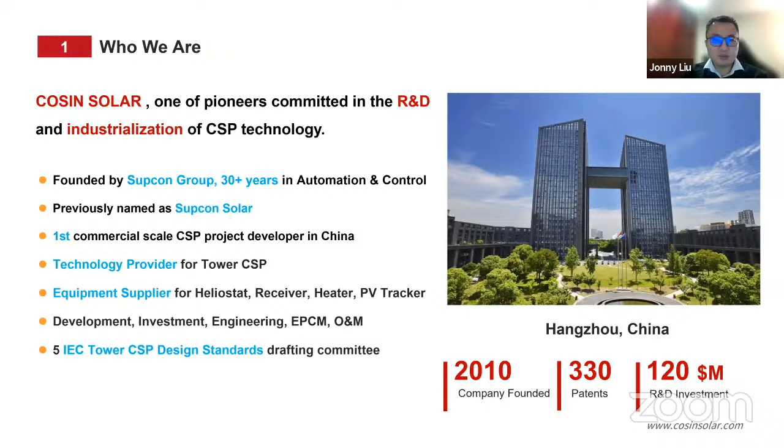I'm Jonny Liu, the Director of Global Business Development of Cosin Solar. So first of all, let me use several minutes to introduce Cosin Solar and our business. Cosin Solar was founded in 2010. We are a technology provider and also equipment supplier for the tower CSP industry. We have mainly 3 business areas. The first one is the CSP power business. It could be a single CSP project or a hybrid project, CSP plus PV plus wind. This is the main business.

And then we also have a molten salt storage business. For this part, we can use the molten salt electric heater to heat the molten salt, not relying on the solar resource, not using the solar field. So it can be more flexible and deployed in more areas. And the third business is we can also provide the PV tracker. This is a new business from Cosin Solar. Desalination is not our main business, but we do have some projects combining CSP, molten salt storage, and desalination, which I will introduce in the last slide.

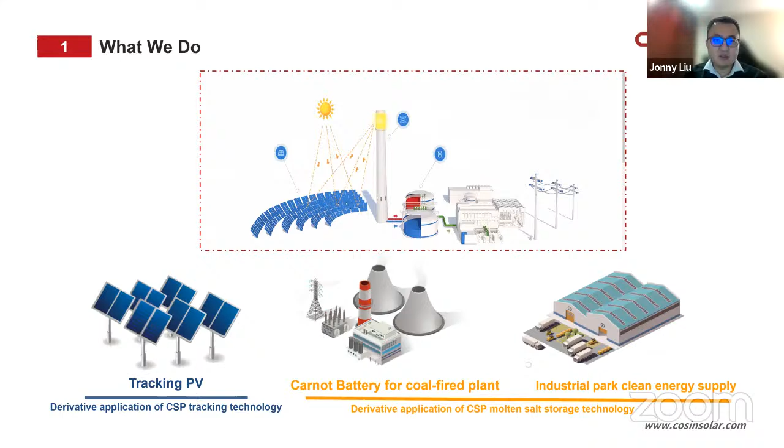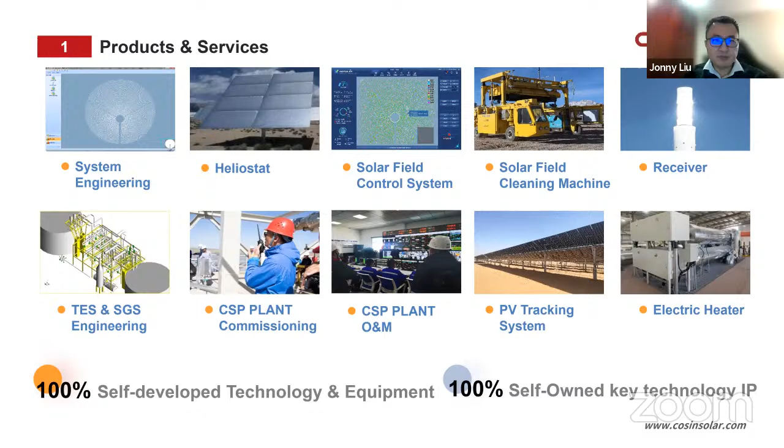Yes, this is all our products and services. For the CSP part, we can do the system engineering. We can provide the equipment, the solar field, and we have our own molten salt electric heater, and we also produce the PV tracker. This is the Cosin Solar project reference. We have 3 projects in operation, totally 110 megawatts, and thanks to the Chinese government's policy for CSP development in the last 2 years, we were awarded 11 new projects, totally 1,250 megawatts, and all these 11 projects are now under construction.

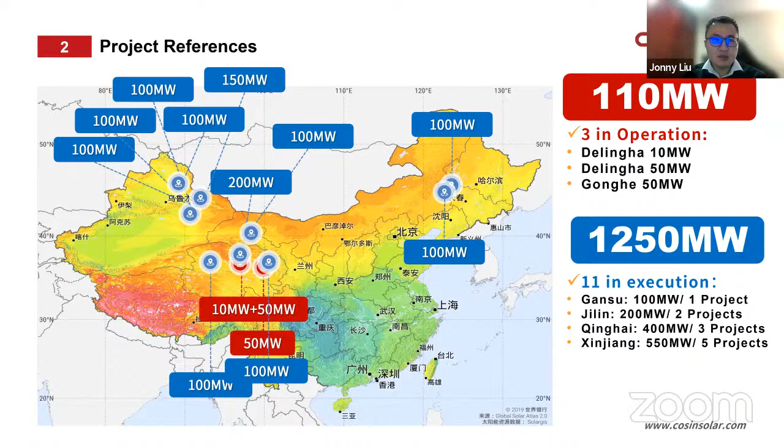These 3 projects are our projects in operation. The first one, the 10 megawatt, started running in 2013 with direct steam. And in 2016, we modified one of the 2 towers to molten salt storage. And then we have another 2 projects at the 50 megawatt level connected to the grid in 2018 and 2019.

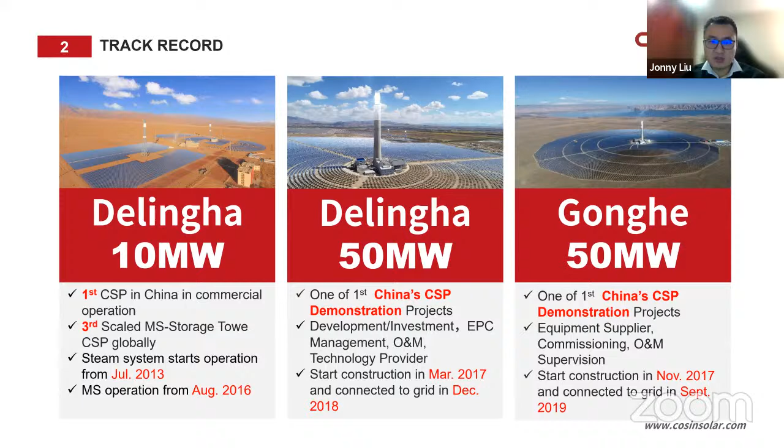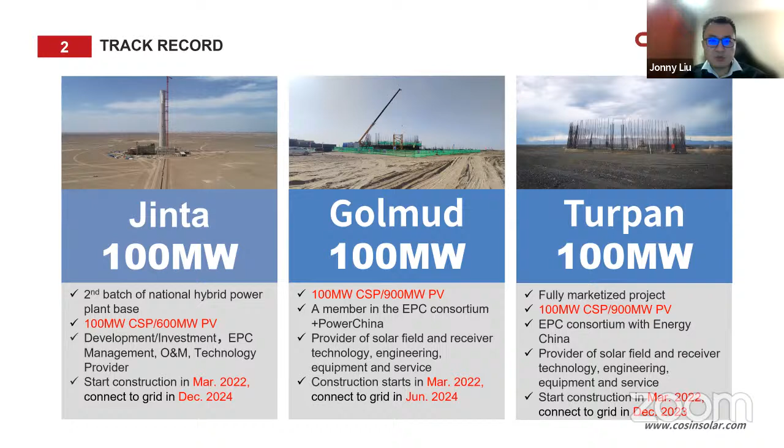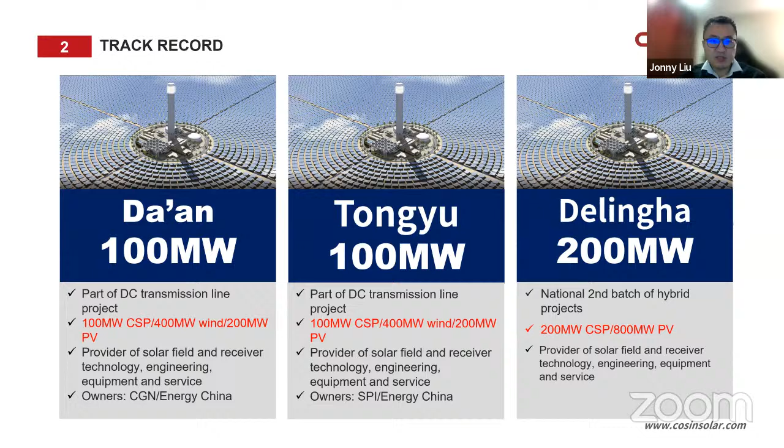And the next slide shows all our new projects under construction. All these projects are hybrid projects. CSP works as storage and peak regulation for the hybrid project. Most of the projects are 100 megawatts, and we also have the 200 megawatt Delingha project under construction. This one is the biggest CSP molten salt tower project in the world. And we also have a Hami 150 megawatt project. So Cosin Solar is now the company with the most project references in the molten salt tower sector.

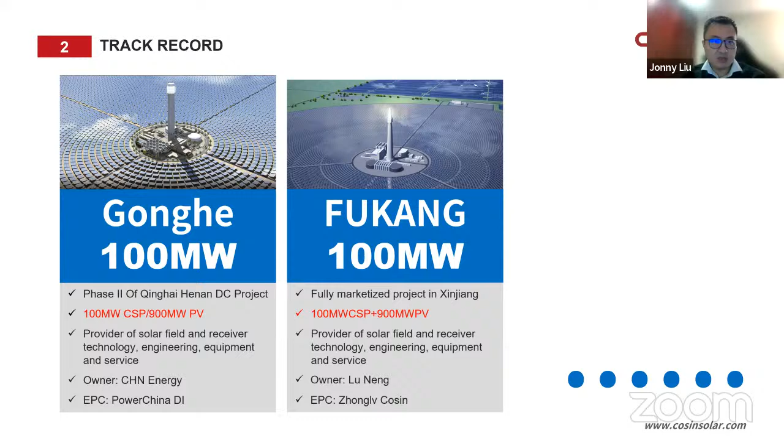Yes, I would like to highlight the Delingha 50 megawatt CSP plant. It was connected to the grid in 2018, and it was designed with 7 hours molten salt storage. This 7 hours means it will run in a day, and after the sun sets, it has a capacity to run 7 hours at 50 megawatts.

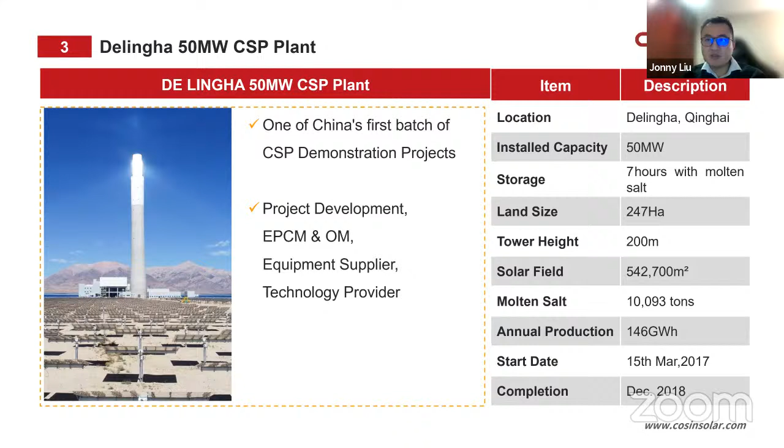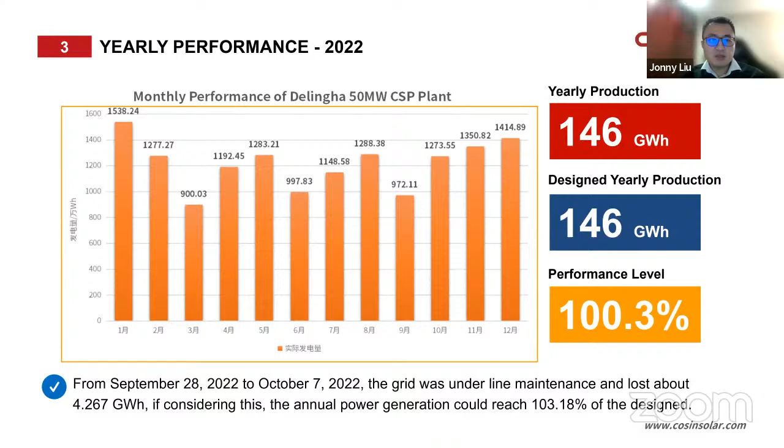This is the site picture. And for the last 2 years, this project has been running more than 100%. So it's a very good performance. So for us, CSP is already a reliable and proven technology.

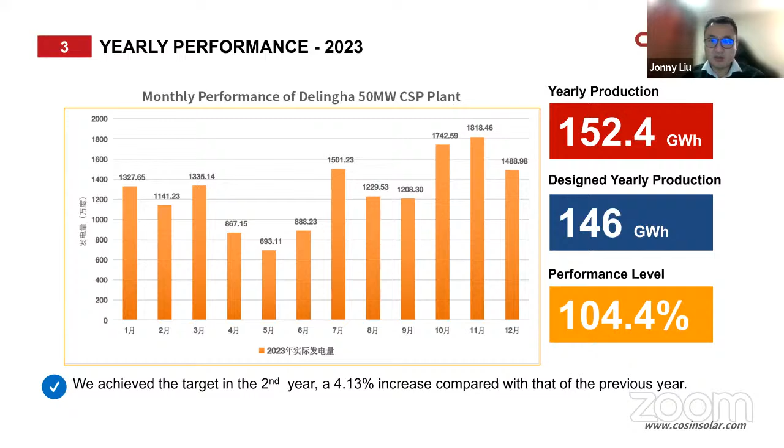Okay, so I will introduce some of our works about how to combine CSP and desalination technologies. First, I would like to introduce a project, the Sundrop project in Australia. Actually, first I want to explain: Cosin Solar doesn't have any work in this Sundrop project, but it's a very typical and very good project to combine CSP and desalination.

This project has operated since 2016, located in Port Augusta, South Australia. This project is about 30 kilometers away from the sea, and it has 3 sectors. One is CSP, not with molten salt. They produce steam and hot water, and then they use the hot water and the MED technology to desalinate the seawater to get fresh water. They also have reverse osmosis for backup.

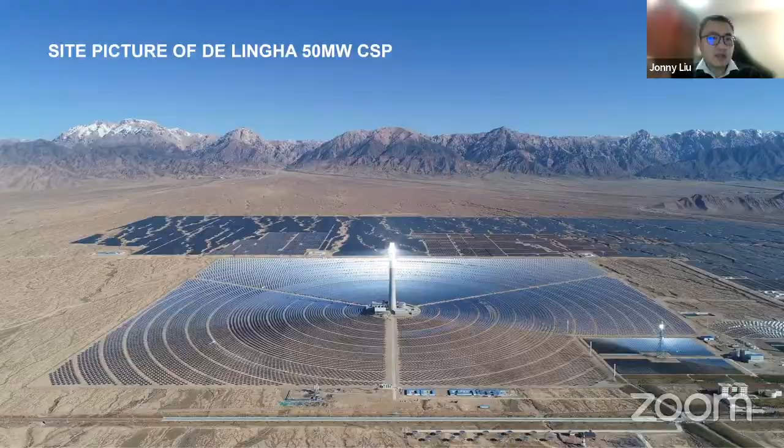And then when they get the fresh water, it's used to grow tomatoes. They have 200,000 square meters of greenhouse, and every year it produces a huge amount of tomatoes. This project is a commercial project, and it works very nicely and is very profitable.

And when it comes to the north part of Chile, we think we can refer to this concept of the Sundrop project to develop a circular economy project, and also put more technology into it. In the north of Chile, we have the best level of solar resource. The DNI is from 2,400 up to even 3,800, and there is also a very big area of free land.

This kind of circular economy project can be located close to the shore, just like the Sundrop project. In some areas the DNI is also more than 2,400, so we can use CSP and MED technology, and we can also combine it with reverse osmosis to desalinate the seawater to get fresh water. This water can be used for agriculture, and also for fish farming.

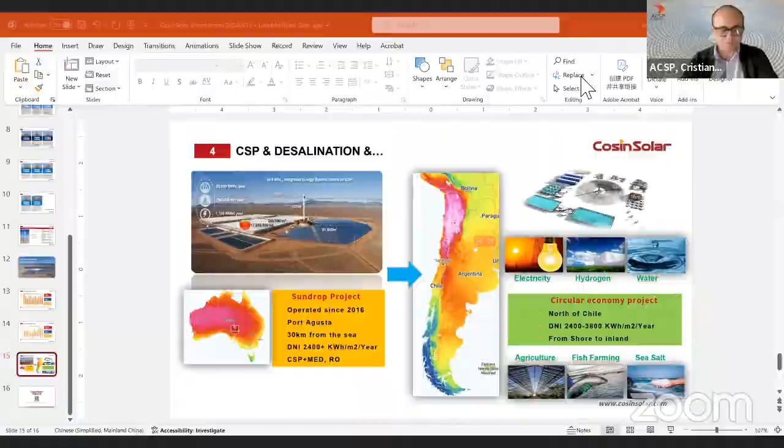No problem. The screen is yours. Okay, let me share the screen. I don't know if you can see my screen already. Yes, I can see it. Yes, no problem. Go ahead.

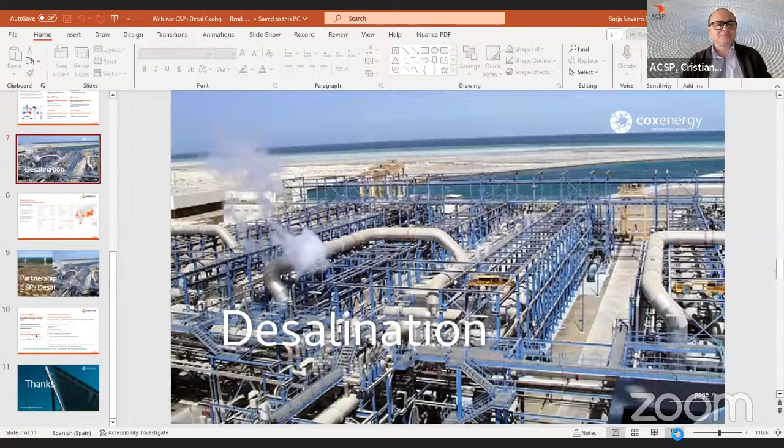As Cristian mentioned, I'm Borja Navarro, the Business Development Global Director for Cox Energy within the Cox Abengoa Group. I will spend a couple of minutes, 3 minutes, to explain, because I understand that most of you know Abengoa and the Abengoa legacy, how the new group of Cox Abengoa is structured. Very quickly, the new Cox Abengoa group is a combination of Abengoa, the traditional Abengoa, deeply involved in both technologies we are speaking about today, not just CSP, but also desalination. So now we are integrating both companies and creating a new industrial group.

As I mentioned, a global group doing different technologies with different verticals, integrated in different business units, but with a very strong legacy, experience and references, not just in CSP and power generation, but also in desalination plants. And as you well know, we are covering the whole value chain of a project, from the development standpoint, and depending on the technology and the geography, we do our own concession and development, but we are also very focused on EPC and operation and maintenance.

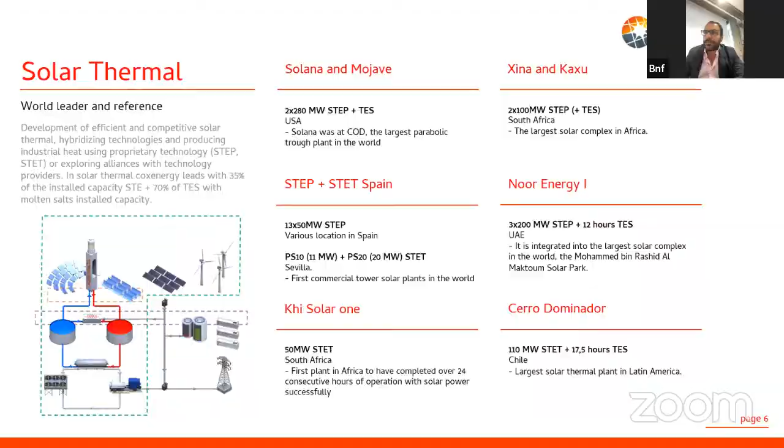Just to show you some of the experiences and references around the world. In the US, in South Africa, you are familiar with the technology, you know all these plants. Also in desalination plants around the world, again more than 30 references. So again, we want to see CSP back in the market.

We see that some countries are betting again on CSP, and the exercise that you, Cristian, mentioned in your invitation, how we can integrate both technologies off grid, on a standalone basis, with a specific consumption and a specific plant capacity, how they can work together, I think is an outstanding strategy. We want to work not just from the EPC standpoint, where we feel comfortable, but also with the customer, developer, utility, IPPs, and ministry level, and I think that is an important bet.

Having said that, I'm not going to go point by point through my presentation. I will leave you to read it, and we will share the presentation with you. But I think we are very aligned with my good friend Johnny before from COSIM. While we agree on the combination of both technologies, the important exercise we need to do is how to dimension, size and design that combination, especially the CSP.

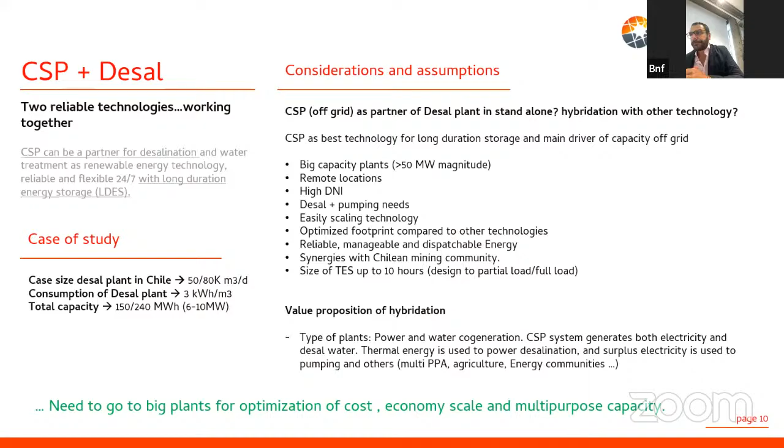So, Cristian, that was my presentation. Open to questions. Excellent, great. Many thanks, Borja, and it is a pleasure to see how one of the big CSP players, Abengoa, is going back to the business, and welcome back. Okay, we never left the business, we were hiding. Yes, you know. Thank you so much for your interesting presentation.

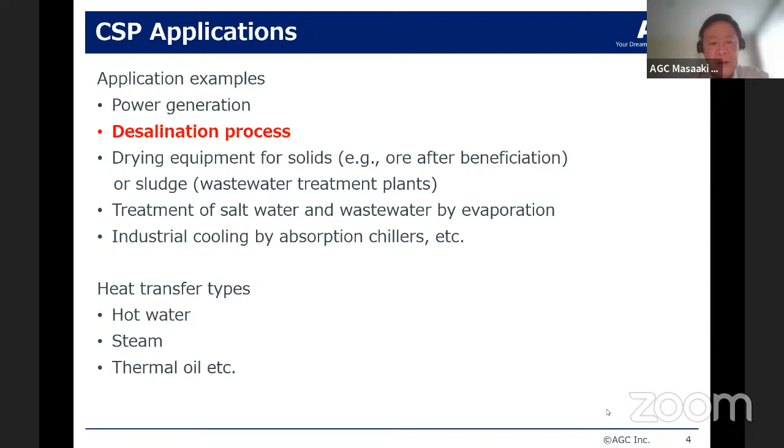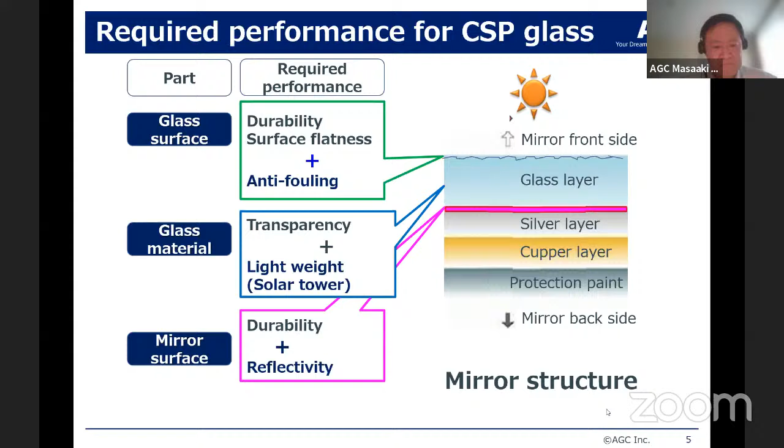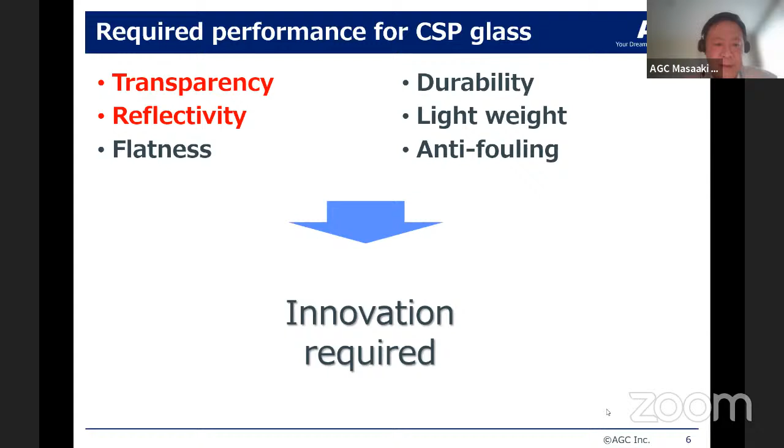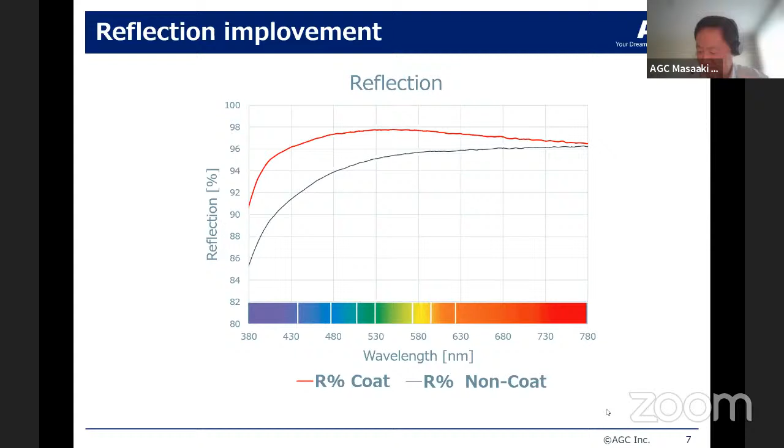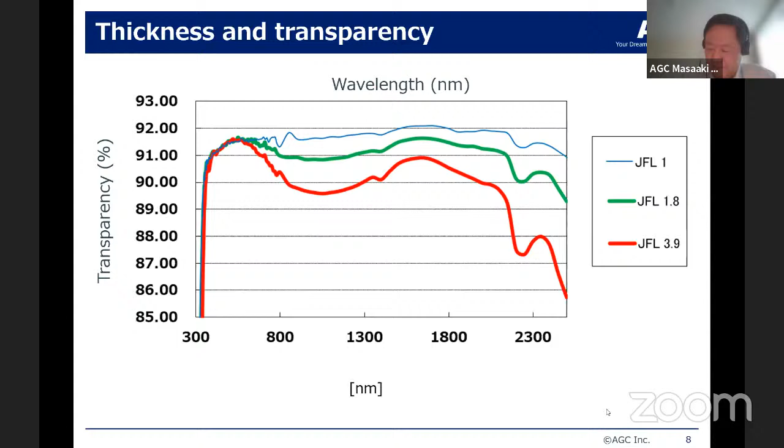I'm very happy to collaborate with Terra Engineering in Spain. So we can make a prototype of a CSP mirror with only 1 millimeter glass. That means high transparency, and also the material is saved because glass is also a limited resource. It is good for circular economy. Now we would like to bring this cutting edge technology to CSP for desalination and other projects.

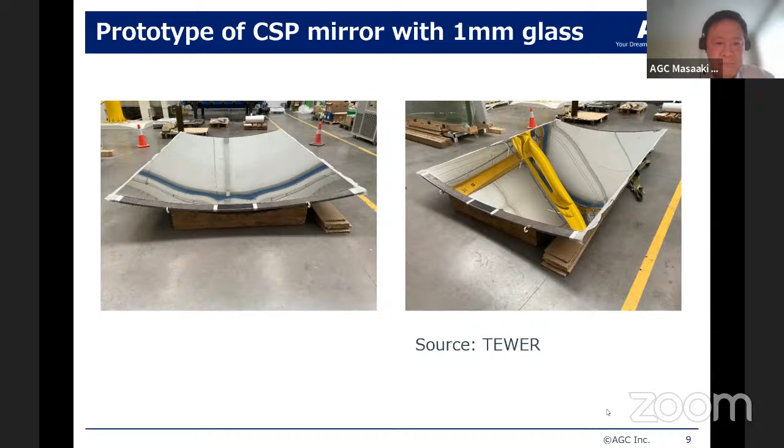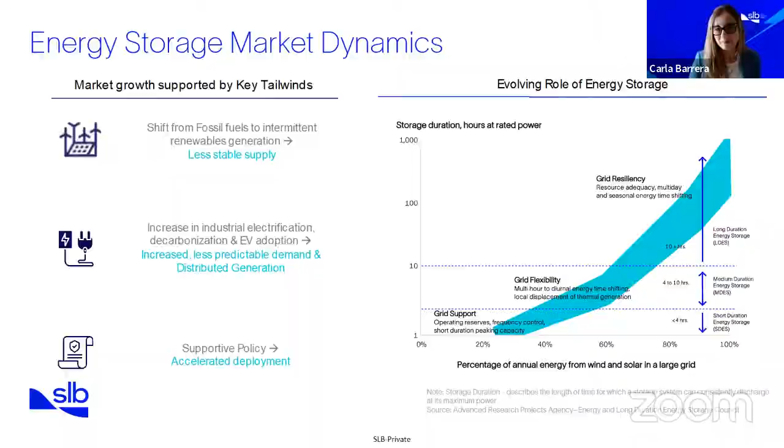I am now going to jump directly to the technology, as we believe that it is really ideally placed to support desalination processes, but also other energy-intensive industries with needs for 24/7 baseload. So I think my fellow panelists here have really explained very well the need, right? The business case for that. And the technology that I will be talking about is a hybrid solar plus thermal storage, which SLB is bringing to the market in partnership with RayGen. RayGen is an Australian technology company that developed this technology.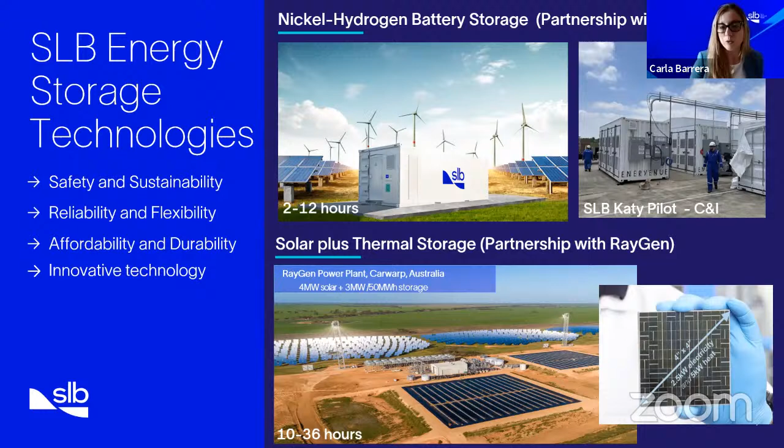Let me give you a quick high-level view of how the technology works. It has mainly two parts, as you can see here. One is the generation part, intermittent solar, and the other one is the storage part, the dispatchable storage. So you have a set of mirrors. I mean, everybody's very familiar. This is not exactly CSP, but it has some of the elements of it.

There is the sunlight that is focused on the photovoltaic modules into the receiver here, which then convert the light into electricity and heat. The electricity can be directly exported to the grid, or it can be used for the chiller to charge the storage. The PV Ultra modules get hot under concentration, of course, and are cooled at the back part with water. And then we capture that waste heat to charge the storage as well.

So we have two pits, right? The hot and the cold one. Water is our storage medium contained in these two reservoirs. The hot pit is charged by the heat coming from cooling down the modules, and the cold pit is charged by the electricity from the modules or from the grid. And it's the temperature difference between the two storage pits that spins the organic Rankine cycle engine that provides the dispatchable electricity.

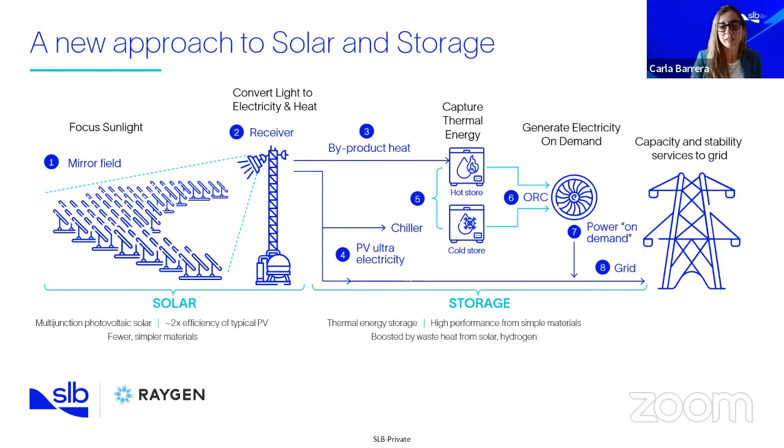Let me talk about the part of harnessing sunlight first. I'm just splitting this into 4 parts. So the field of mirrors focus the sunlight onto a tower that has a photovoltaic receiver. The mirrors are low cost. They are made of simple materials, mainly glass, steel. They are low complexity and don't require any foundations, which is a big advantage. They are self-powered. We don't need any wiring.

The mirrors also have a small PV and a battery to track the sun throughout the day, so they can self-calibrate to find the receiver without any encoders. The mirrors are suitable for agrivoltaics as well. As you can see in the photo here, they are elevated off the ground and they move dynamically, avoiding fixed shading and increasing feed growth as well.

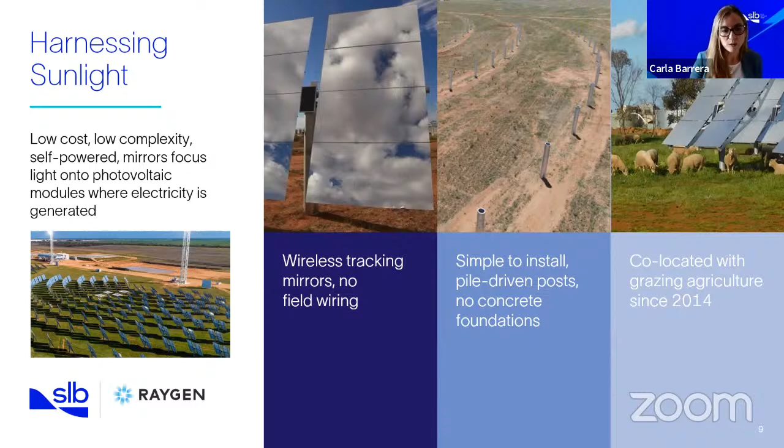At the top of the tower, we have the solar modules that generate electricity and heat. The PV Ultra modules are only 10 by 10 centimeters. They fit into your palm, as you see in the photo, very, very nicely done, and they generate 2.5 kilowatts of electricity and 5 kilowatts of heat. 2 of these are as powerful as a whole rooftop of solar and hot water.

We are converting light very efficiently because we're not using polysilicon. We use triple junction cells that have been used in space. So they are very, very powerful, and they grab twice as much sunlight as traditional silicon. These modules, which are really the IP of the technology, are manufactured in Australia. Again, no polysilicon is being used, and so there is the de-risking of the supply chains.

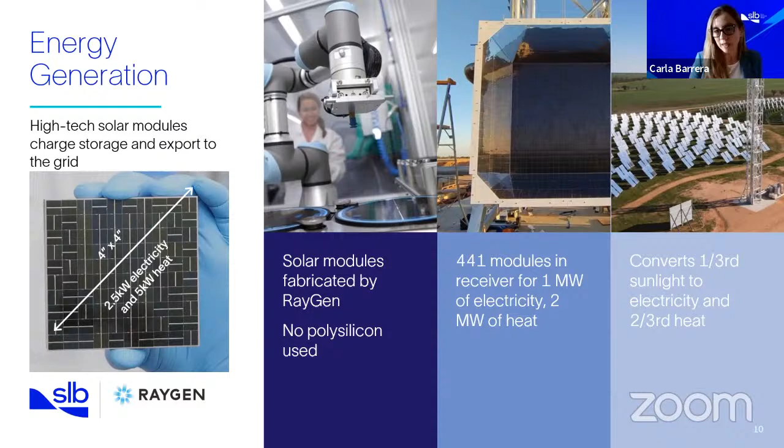When it comes to the energy storage part, we are using the lowest cost storage medium, which is water, making the long duration storage low cost, low risk, and very efficient. So as I was mentioning before, we have these 2 reservoirs of water, one heated to 90 degrees, and the other one cooled to 0 degrees. We fill up the pits only once, and there's hardly any water being lost during the operation. They also can hold the temperature for months.

As you can see here, they are very efficient. They just have low-cost rubber insulation. The depth is around 15 or 20 meters. And they can hold a temperature for months with less than 10% of energy being lost over 6 months. Therefore, they can be also applicable for seasonal storage.

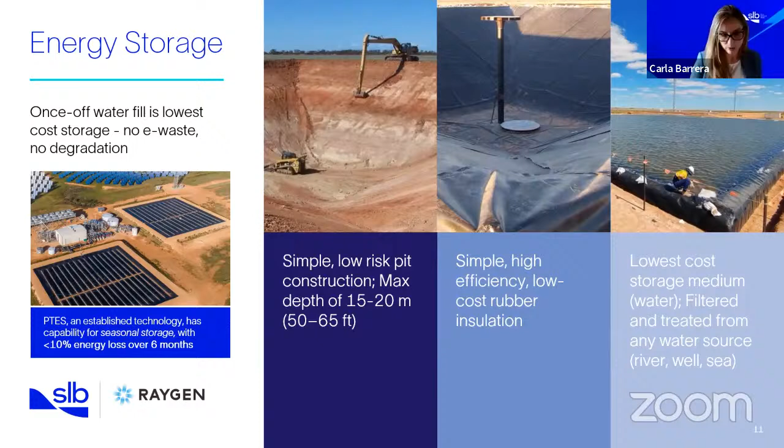Regarding energy dispatch, we use widely established technologies to dispatch the energy or to act as a load. For example, the pit thermal energy storage, which is used in district heating in Denmark, Germany, and also the organic Rankine cycle that I mentioned before, which is an engine widely used in geothermal applications. It provides the thermal energy by a heat exchanger to evaporate the ammonia in a closed loop system. The ammonia is really the fluid that runs the engine.

As the ORC is a high-speed turbine using low heat temperatures, it takes less than 5 minutes to ramp up from cold and can respond within 6 seconds when it's on. So it's very, very fast. Another important thing to mention is the net electrical round-trip efficiency of the system. This is between 70 and 80%, which is very, very high for this type of system. Very efficient when you get the free heat from the modules. And you can have a slight decrease in the efficiency, of course, if you use heat pumps. But overall, we are between 70 and 80%.

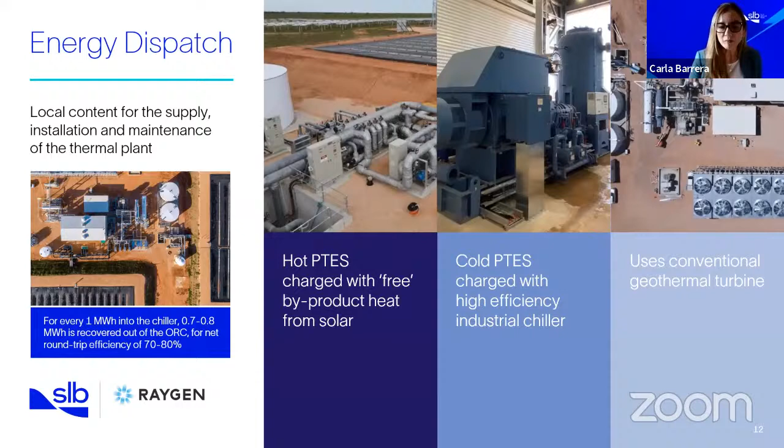Let me take a look here at the integration of renewable energy for desalination. We have seen from the previous presenters as well about the use of PV and reverse osmosis, which is really the most common. It has been done, I think, cost efficiently in small scale, but we still need to get there at a larger scale and being cost efficient.

I have read about other cases using wind and also using CSP, as we have heard as well here. But the challenges remain, the challenges in cost, the challenges on the environmental impact. And of course, renewable energy is intermittent by nature. So the lack of continuous supply is always a problem, for which long duration storage is really mandatory to be able to address desalination.

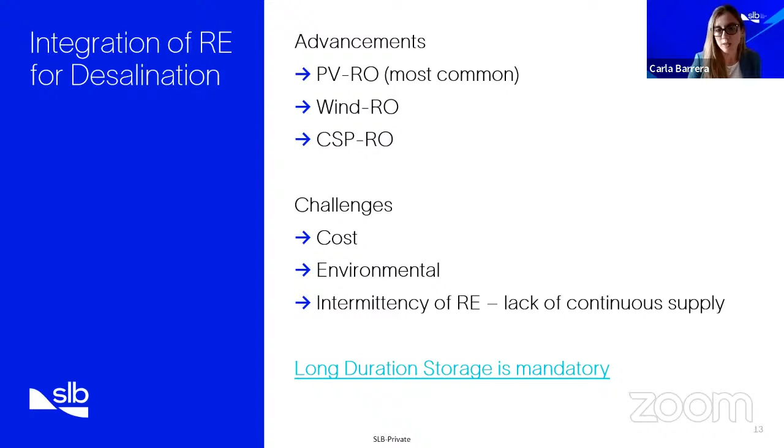For RayGen use cases and value propositions, we have mainly 2. And we have several use cases as well as revenue streams. But let me focus on the one that is applicable for the purpose of this presentation on desalination. So baseload for large energy users aiming for reliable generation and to minimize energy costs, as is the case here for desalination plants. We work with large energy users like mines, green hydrogen, ammonia plants that have very similar needs as desalination plants to provide 100% baseload capacity.

Further benefit is that having a constant baseload power allows for continuous operation of a desalination reverse osmosis plant from a renewable source of energy. And this, we understand, improves the lifespan of RO membrane. They typically prefer constant pressures and rates to maintain the constant selectivity.

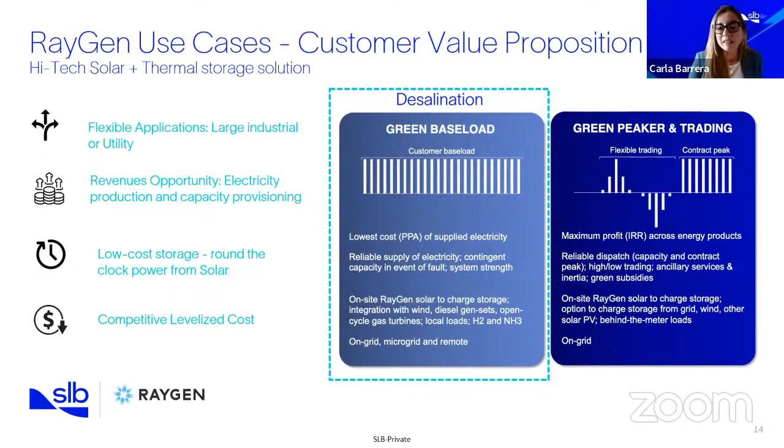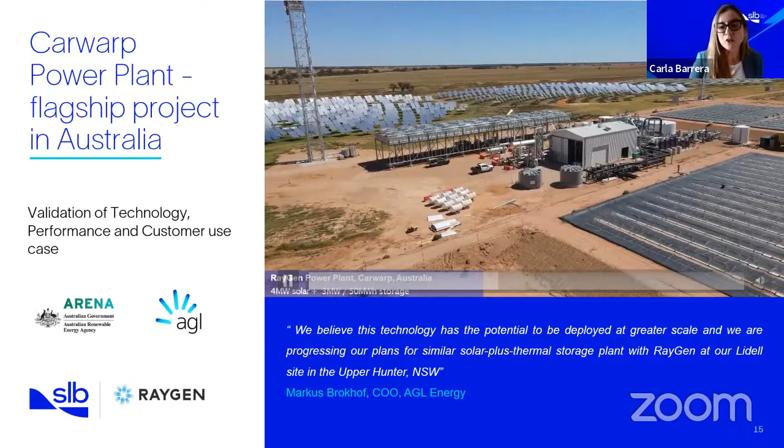To wrap up, I just want to leave you with our flagship project in Australia, in Carwarp. As you can see here, this is close to Mildura in Victoria, for those familiar with Australia. It is demonstrating that our technology works and obviously can be commercialized. At the moment, this is a 4 megawatt solar, but 50 megawatt hours storage. So that's 17 hours. So that is one of the largest next generation long duration energy storage technologies that is operational at the moment. It is also the highest efficiency operating utility scale solar PV project.

And another project in the making is Yadnarie in South Australia that demonstrates how our technology can scale up and be deployed at utility scale. This project is 150 megawatt solar, 1.1 gigawatt hours storage for a 12-hour plant. You see here what are the target dates for financial close. So we are working very hard on this other project in Australia. And the focus really now is on deploying this technology internationally.

And we believe that Chile, in agreement with my fellow panelists, offers the best DNI, the best resource quality overall in the world, and also has a critical need for such systems and other CSP systems as well. There's no one silver bullet, of course, but not only for desalination, but also for the other great industries in which Chile is leading and needs 24/7 baseload, such as mining, green hydrogen, ammonia, and where Chile is having a really protagonist role in the world.

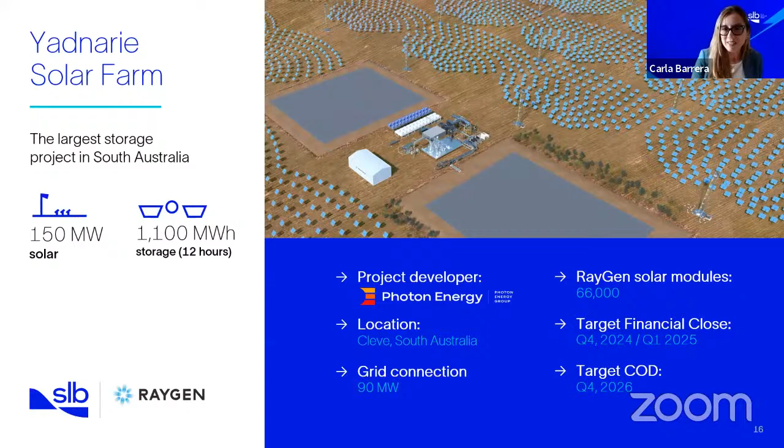Thank you, Carla, very much for your excellent presentation. It's very good to see how your technology could be scalable from a small project to a big project. Could be for desalination, mining, ammonia. It doesn't depend on the future user. And thank you very much.

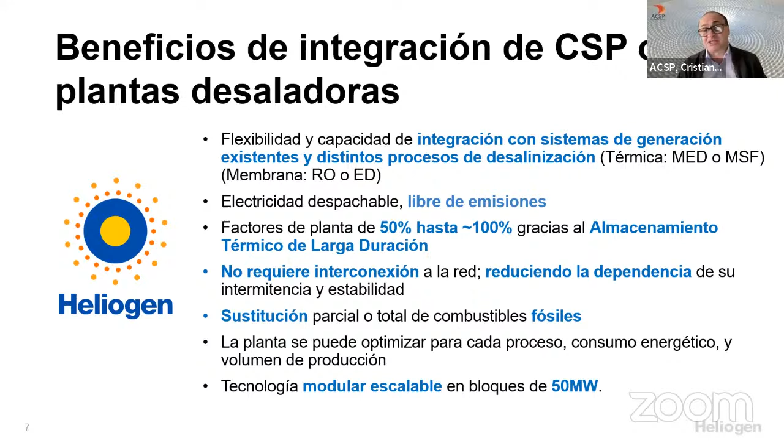Thank you, Jose, for your time. Yeah, you're right. You mentioned our problems, especially in Chile, the curtailment. The curtailment on transmission lines is a very, very complicated problem. Right now, we are losing more than, let's say, 2,500, 2,800 mega in the north side of Chile per day because of the curtailment.

So a small CSP could be the solution, not connected to the grid. So less cost from the system, no transmission problems. So that's the idea, thinking how CSP not connected to the grid could be the solution for this kind of problem. So thank you very much for your presentation, Jose.

You're welcome. And I'll end with this, that in some areas the costs are as high as $30 per megawatt for transmission, distribution. So it's substantial enough that it affects the companies and the projects' returns. So thank you.

Here's our unique technology. One breakthrough technology is our solar receiver, a standard module that sits on top of a 35-meter tower and heats air to almost 1,000 degrees centigrade. And then we can store that heat fairly cheaply for long periods of time. And we store it in pebble bed-like containers using blowers and dampers to move the air through the system.

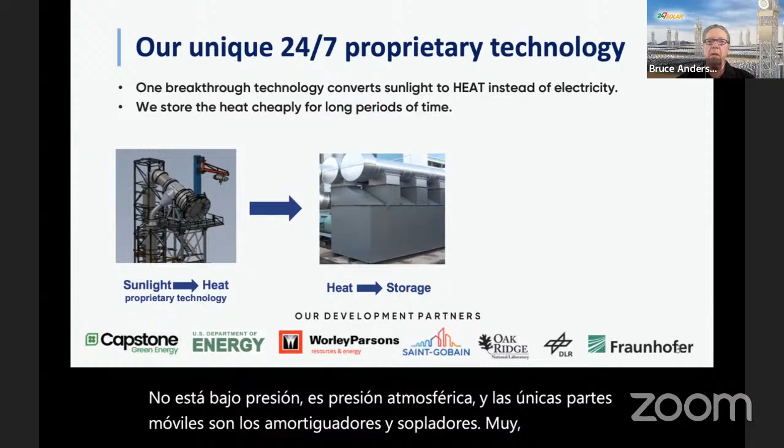And I want to emphasize that the air in our system is at ambient pressure. It's not under pressure, it's atmospheric pressure. And the only moving parts are the dampers and blowers. Very, very simple system. About as simple a system as CSP can be.

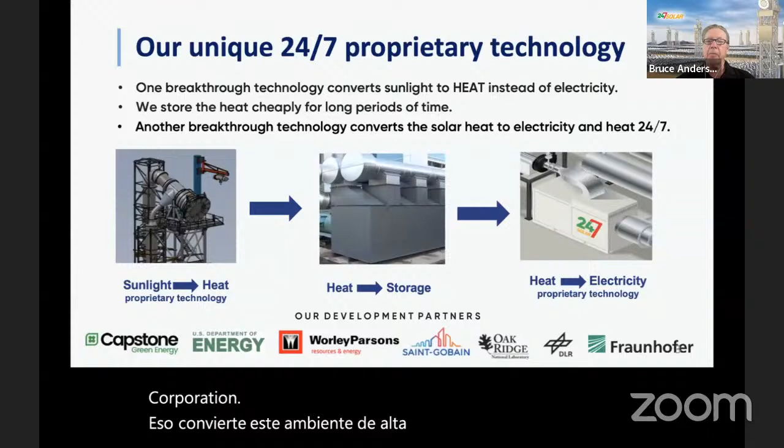Then we have another proprietary technology that is a small turbine made by Capstone Corporation that converts this high temperature ambient pressure air into electricity and also process heat as needed without combustion or emissions. It's also equipped with an external combustor that can burn almost any fuel, including e-fuels, solar fuels, hydrogen, and so on, but even diesel.

And in this manner, we can eliminate all backup systems and gensets and eliminate that need for a backup power plant of any size.

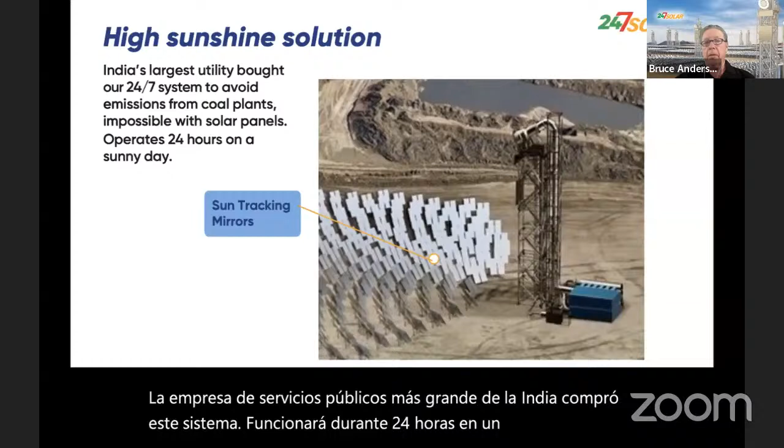This is an example of our system. It's 400 kilowatts. Actually, this one is 600. India's largest utility bought this system. It'll operate for 24 hours on a sunny day. The heliostats on the ground, of course, reflect their light up on top of the tower to our solar receiver. And some of it during the day powers our turbine, and some of it is stored in our thermal energy storage system.

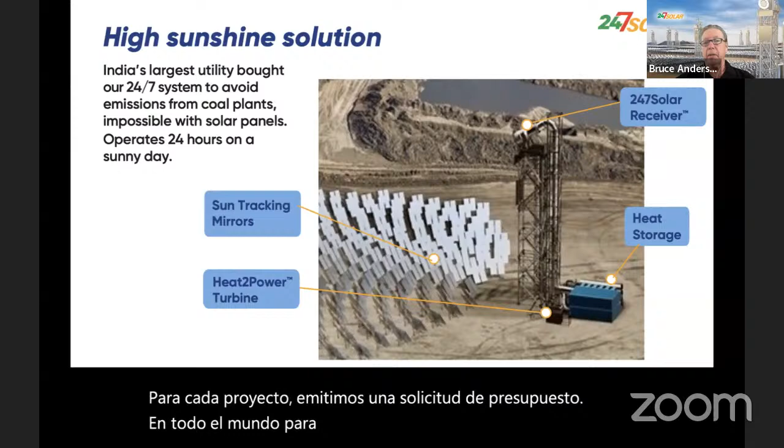We provide everything except the heliostats. For every project, we issue an RFQ around the world to get the best heliostat for that particular application. We also have a product that is considered a long-duration energy storage product for industry. We've taken this special high-performance turbine that I described and combined it with our thermal energy storage system. And in this case, we heat the storage by using an electric resistance coil that converts electricity from any source to heat.

And this is particularly useful for industry, which has multiple challenges. Not only do they need heat, but they also need electricity. And depending on their location, they may need a backup system and often use gensets or the grid, which may not be dependable. And this turbine I described can operate as a genset in that sense, a backup system that keeps that industrial operation going even during the worst weather and grid challenges and so on.

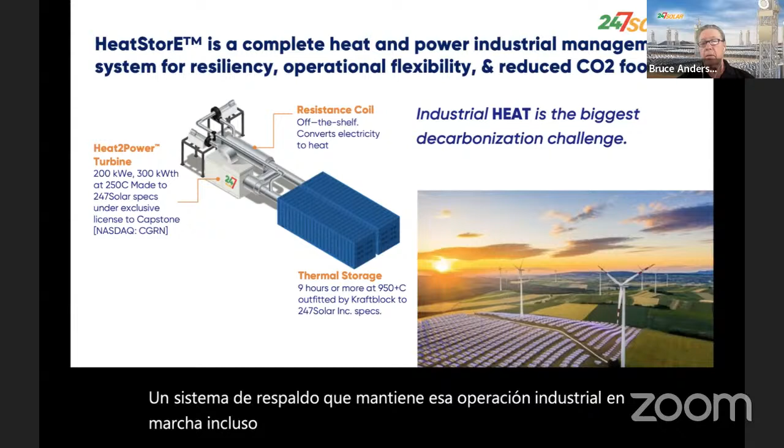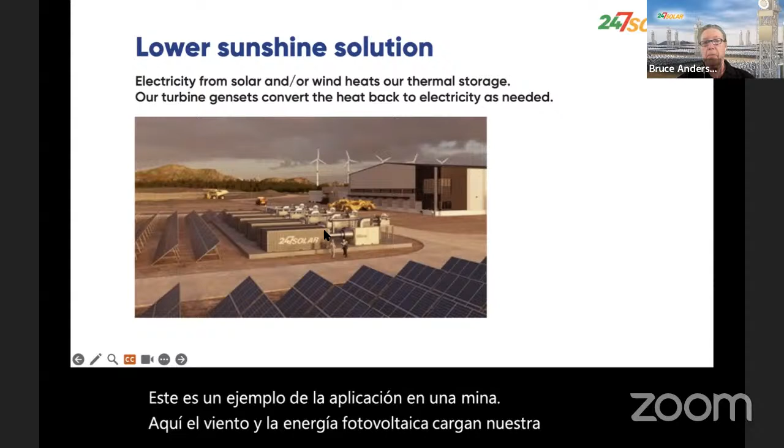This is an example of the application in a mine. Here, the wind and the PV charges our thermal battery, our storage right here, and our turbine right here. And the results are really sensational. The cost of ownership plummets compared with using conventional gensets powered by diesel.

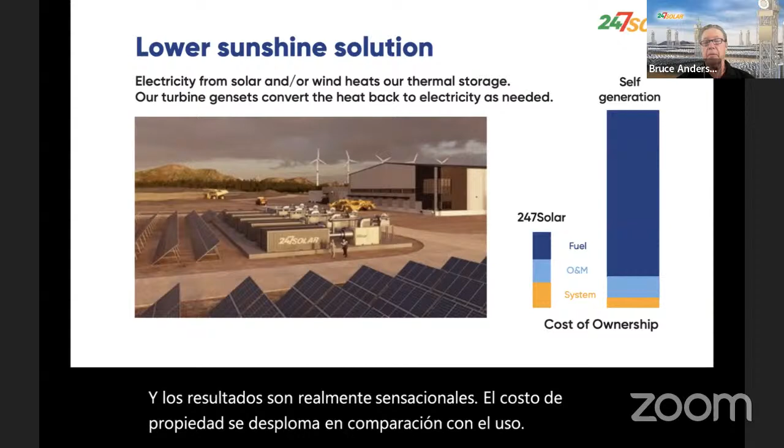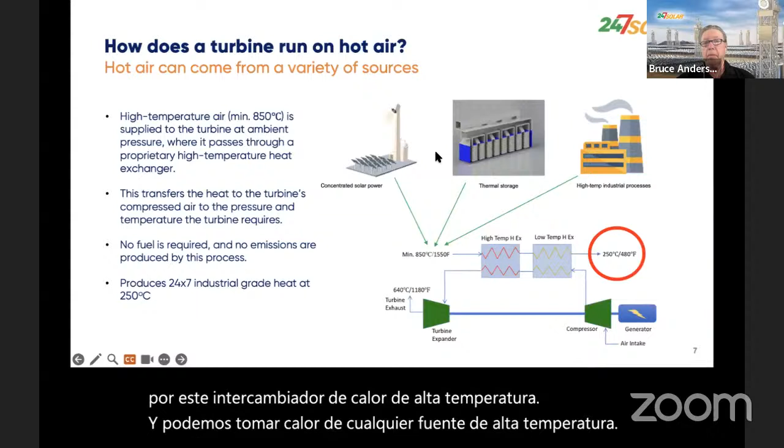Now, what most people ask is, how does our turbine work? Because how do you drive a turbine without combustion? Well, it's not very easy, actually. In this case, we removed the combustor and replaced it with this high temperature heat exchanger. And we can take heat from any high temperature source, a factory, thermal storage system, or our CSP system, and put it through the heat exchanger, which acts as the combustor by heating to full turbine inlet temperature the air coming from the compressor.

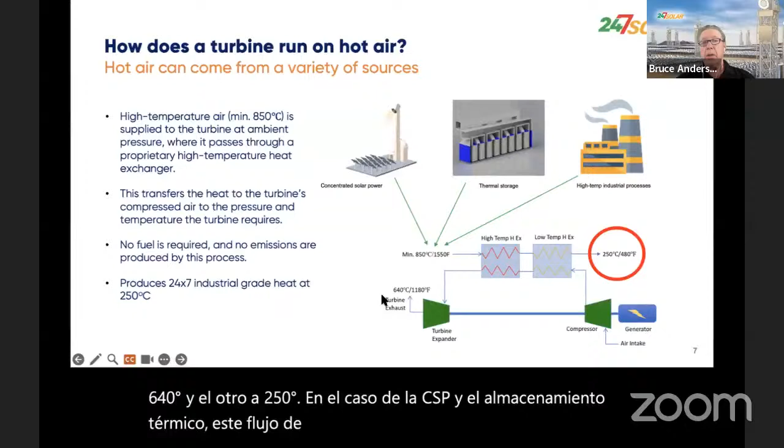And it puts off two sources of exhaust, one at 640 degrees and the other at 250 degrees. In the case of CSP and thermal storage, this airflow goes back to the thermal storage or the concentrated solar system for reheating. Obviously, a system like this that produces high quality electricity and heat has many applications. And we're working with partners to develop those applications as turnkey systems.

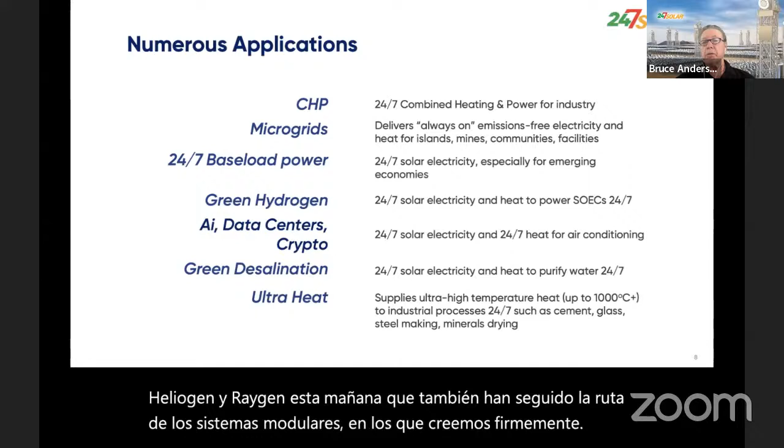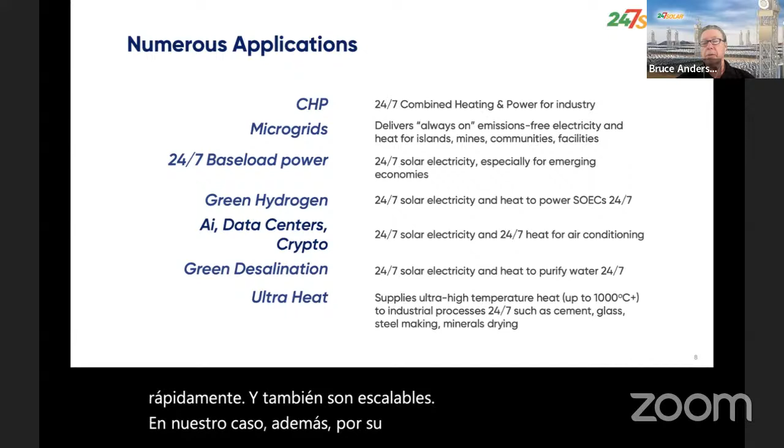And here I should just emphasize that this is modular, unlike most CSP, but we've also seen both Heliogen and Raygen this morning that have also gone the route of modular systems, which we believe strongly in. And the principal advantage, of course, is that most of the components can be made in factories and get the benefits of mass production, driving down costs quickly. And they're also scalable. In our case, in addition, because of its really incredible simplicity, we need no operators on our site. It's all operated and monitored remotely.